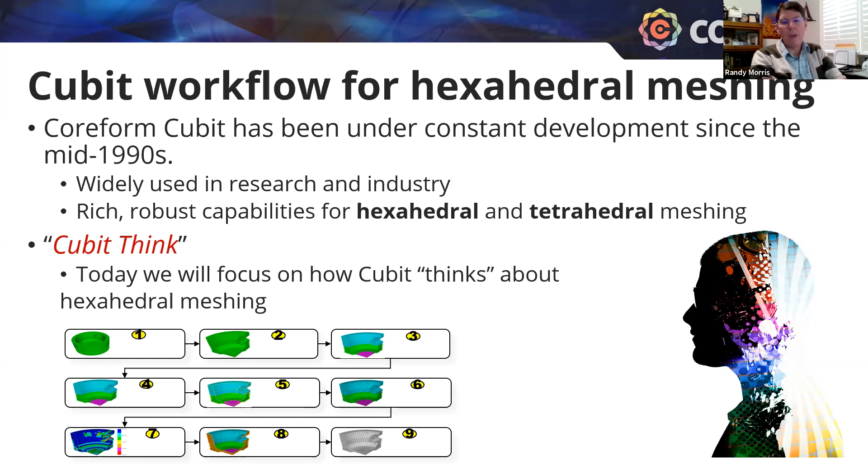So really the purpose of this webinar is to talk about that workflow, and we call it Cubit Think. The workflow is this: we import solid models, simplify geometry, and decompose geometry. Steps 2 and 3 are where we will focus today, and within those steps there's a particular workflow that is most effective.

Step number 4, imprint and merge, is something that we'll talk about a little bit. It makes Cubit somewhat unique in that it is a specific part of the workflow that we need to do by hand - a little bit different than other codes possibly. There's some good reasons for this, for having step 4. Other workflows have good reasons for that too, but this is the way Cubit likes to do things.

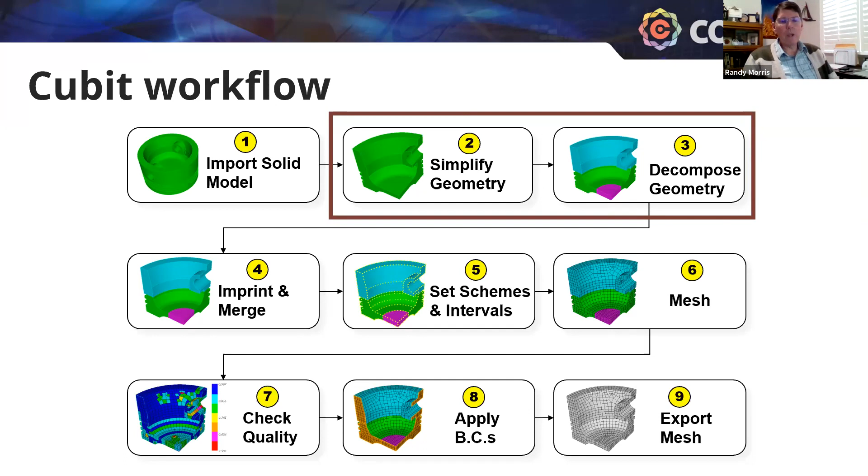Step 4, so 2, 3, and 4 really are where we're going to focus our attention. Once we've got the model ready to go, setting schemes and intervals and meshing is actually quite simple. So let's go ahead and look at these learning objectives.

We're going to take this - you saw that model at the beginning, we call it knuckle, we'll see it on the next slide. We're going to mesh that knuckle using 2 different workflows. One of them will be using sort of our standard power tools, commands from the command panels and the command line, and a few things like that, sort of the normal way of doing things.

The other way is going to be using the ITEM wizard, which is a user-directed wizard. It is really, really good for new users and intermittent users - in other words, if you're not meshing all of the time, you mesh a few times a year, ITEM might be really, really effective for you. Or if you're brand new, it might be a good way to learn the workflow.

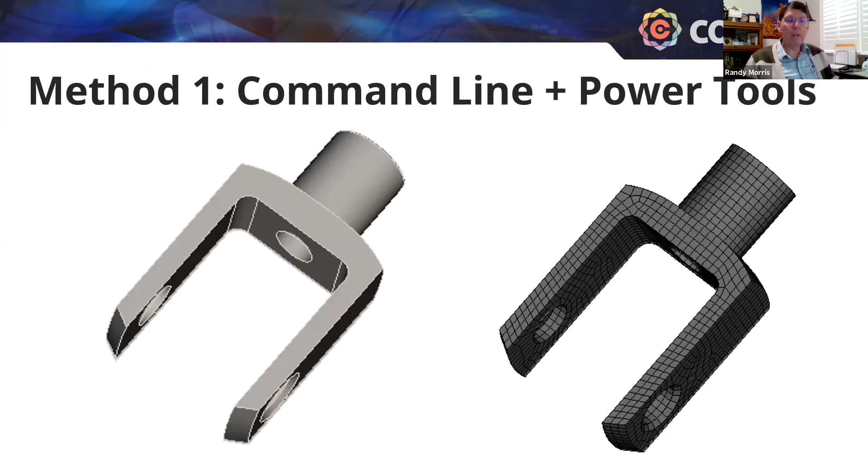So this first method is the command line and power tools, and so let's go ahead and dig in. If I'm set up properly here - here we go, hang on. All right, this is live Cubit. I've got this going, and I'm going to go through this workflow with you.

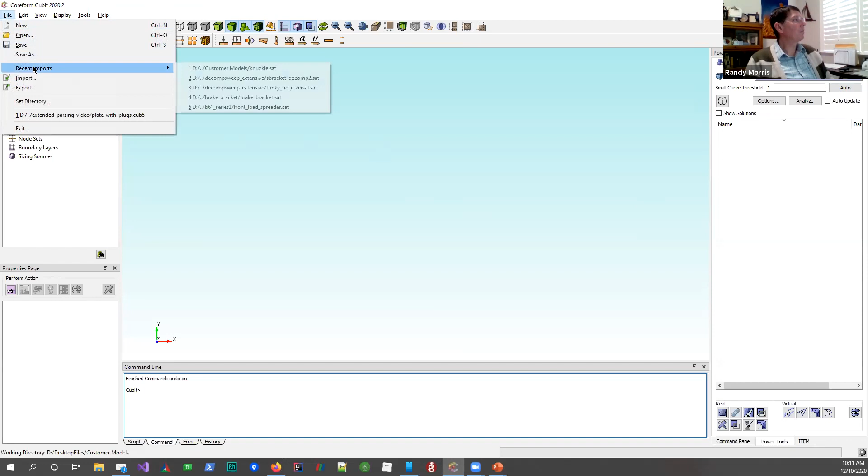All right, so here we go. I'm going to go ahead and import that model. I'm going to go to File menu - obviously I've got it in my recent imports. Go over there, grab this guy. That's what we call knuckle, and it's a very interesting little thing.

It's not going to be automatically hex meshed because there are some issues we'll talk about, not only in terms of defeaturing, but just in terms of how do you actually put a continuous hex mesh on something that looks like this. It's got holes, it's got these blends down here, it's got this cylinder up here with a hole through it, it's got some interesting features along there. All of these make hex meshing challenging.

We've got this tiny little surface. Let me show this little surface right here. That little guy there. This little guy up here at the top. These are all challenging things. If you think about putting hex elements in something that looks like that little small surface around there, that might not be effective. Anyway, those are the things that we learn about.

So let's do this. I am in what we call the geometry, the diagnose geometry power tool. I got that by clicking on this tab at the bottom. See if I'm on the bottom right. These are our command panels, the power tools, and ITEM. We'll get to ITEM in a bit.

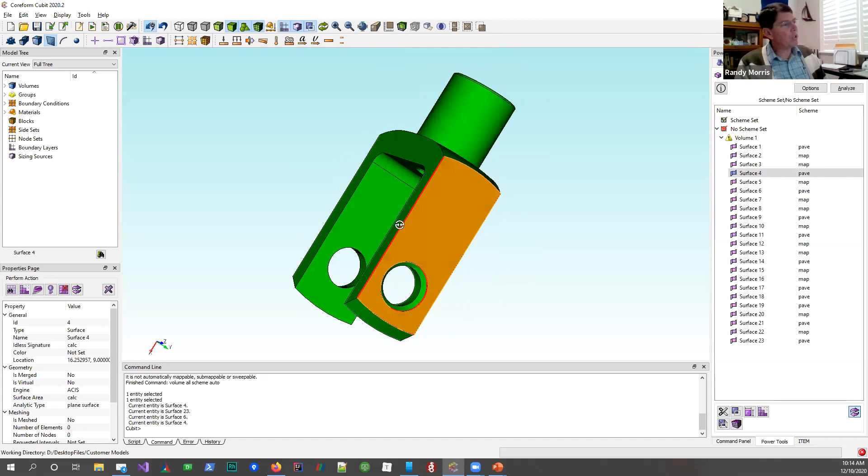That's interesting because how we usually do this is when we do hex meshing, we're looking for surfaces that we can pave, that's a quad mesh, and then we sweep from a source to a target through the part, and the linking surfaces have to be mapped. So in this particular case, if somehow I wanted to pave this surface, and that would be required, right? Because I've got this hole, I can't put a map, I can't put a regular grid on this surface. It needs to be paved.

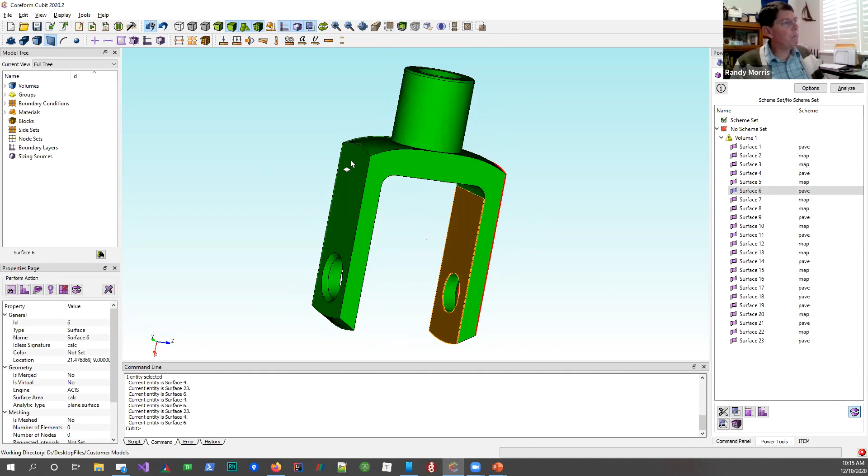And I can look at that just as an analyst and say, well, that's got to be the source, maybe the target's over here, it's got to sweep through this direction, which means this surface needs to be mapped. Cubit's saying no, the only way I can think about that surface right now is pave. So that is giving me some clues of how I need to treat this model. In a subsequent step, we're going to isolate some of these parts by cutting them and making smaller volumes that can be paved and then swept. So in the end, I'll cut things here so that this surface can be paved, this surface can be paved, and this surface right here, which is a linking surface, as well as this one down here, can be mapped. It has to be that case.

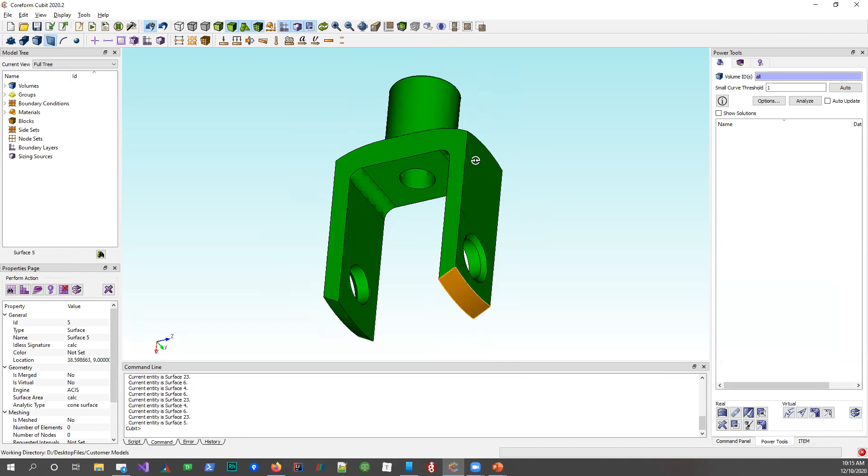So anyway, let's go back to this tool. So a map surface then, Randy, is one that just has 4 sides with no holes inside, is that right? That's right. So yeah, when we look at a surface to be mapped, we have logically 4 sides. Doesn't have to be an actual rectangle or a square with 90-degree angles, but logically 4 sides, and we can put a nice regular mapped grid in there. That's right. Great, yeah, thank you.

So back at this tool, I'm going to click Show Solutions. For some of you who have used Trelis or Cubit for a while, this is version 2020.2, which we released about 2 weeks ago. This is a new feature in this tool, Show Solutions. The old version of the tool just did this. We're going to click on this, which for those who have been around for a while recognize this as an ITEM-like interface. I'm going to go ahead and click Auto Update, so as I make changes here in a minute, you'll see why I do that.

I'm going to click Analyze. I've given it a small curve threshold of 1 as an experiment. That means that's the size of the mesh element I consider to be small. Any feature smaller than 1 will be flagged as a potential issue.

That makes sense, right? If I've got a curve that's shorter than 1 - remember, Cubit is unitless, so 1 is just relative to this model - and I've said I don't want to put a mesh element smaller than 1 in this model, this will be flagged as a feature that we need to address.

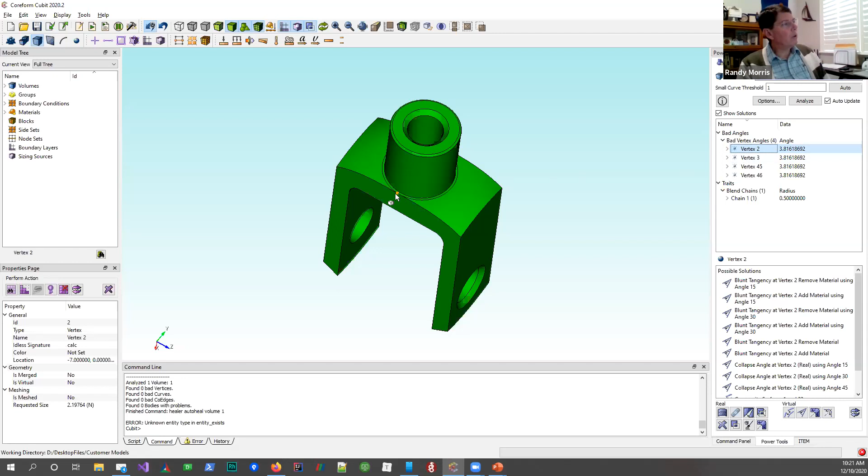So I like that a lot. I'm looking at this model though, thinking that I don't exactly love the answers that I'm getting. If I click on these up here, vertex 2, clearly there's an issue down there with those surfaces. I don't like those at all - I can't put a good hex mesh in there.

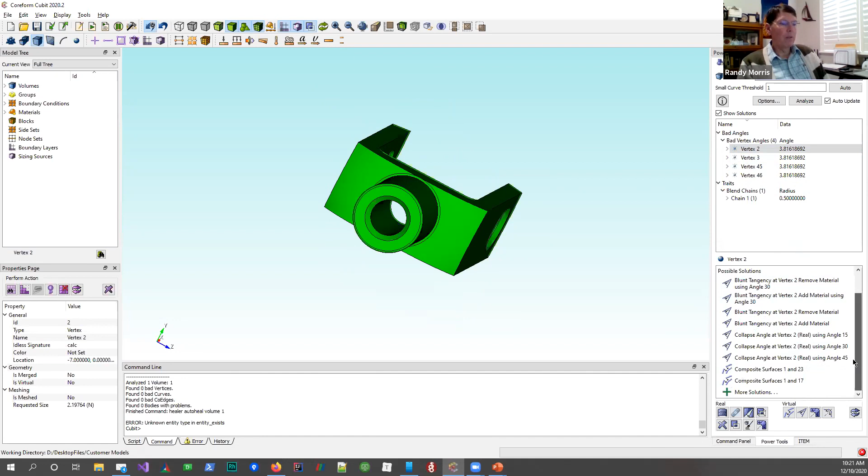Down here, as I'm clicking on these things, it is giving me some ideas of what I might do. There's blunt tangency commands, there's collapsing angle commands, there's compositing surfaces 1 and 23. If I click on that, for instance, to say, well, we could do this - we could take this surface up here and this surface right here and make them one surface.

Well, no, that's a terrible idea. Let's not do that, right? Again, we're just trying to give you ideas of things that you might do as an analyst. In this particular case, I don't like these things, so I'm going to select out there so that highlight goes away.

Let's look at this for just a moment here. We have this idea of removing surface 15. So we've got this blend chain.

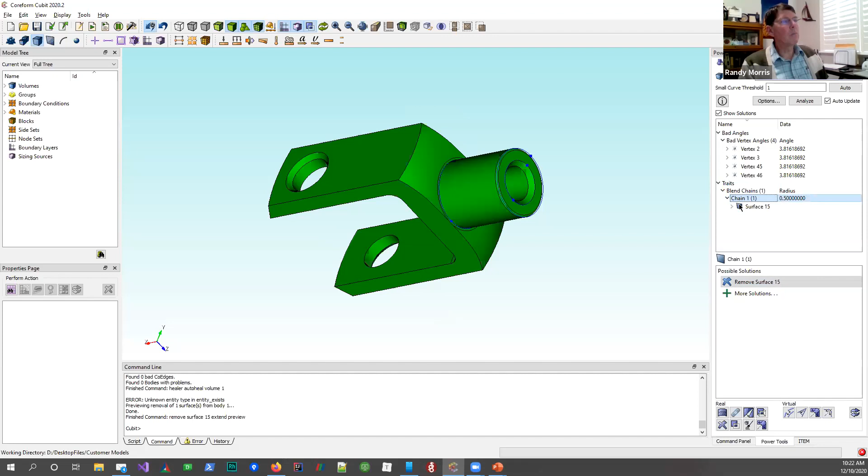And it says remove surface 15. Surface 15 is that little guy right there. I right-clicked, drew it, and that's how I saw that. To get my graphics back, I clicked that little guy up there.

But I'm seeing that as a surface that is problematic. It says I can just remove it. So if I click on that and then right-click, execute, it's going to generate this command down here. So my eyes now are down on the command line. It just generated remove surface 15 extend.

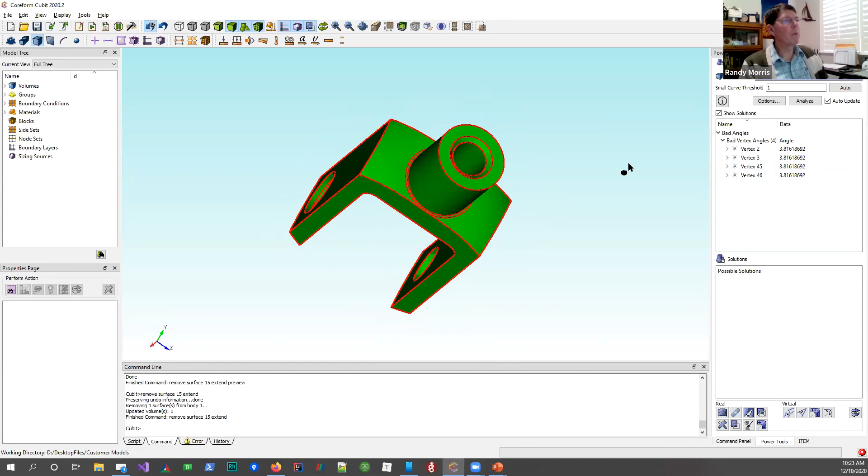And now that particular issue has gone away with regards to that blend chain. But I still got this problem down here, this little guy down there. I know I want to get rid of him. So let me turn that off right there so I stop highlighting the volume.

I'm going to do something here. I'm going to change the small curve threshold to something a little bit smaller, to 0.5 and see. I didn't want to do that - sorry, hit auto, it's something different. 0.5, analyze, and I've got this surface down there.

Now this has been defined as a closed loop. Again, these terms aren't that important, but what it's telling me is that the curve for the loop around this surface right here and the curve for this surface right here are very close. Well, they're very, very close, right? So I know this, I do know I want to get rid of that.

So if I click on that guy right there, it says one thing I can do is remove surface 17. In this case, I'm going to right click again, let's go to the command panel this time. And you can see that the command is going to be similar to the other one. We're going to issue a surface 17 remove, the extend option is on by default. And if I preview that, which we're already doing, we'll see that we're going to get this model.

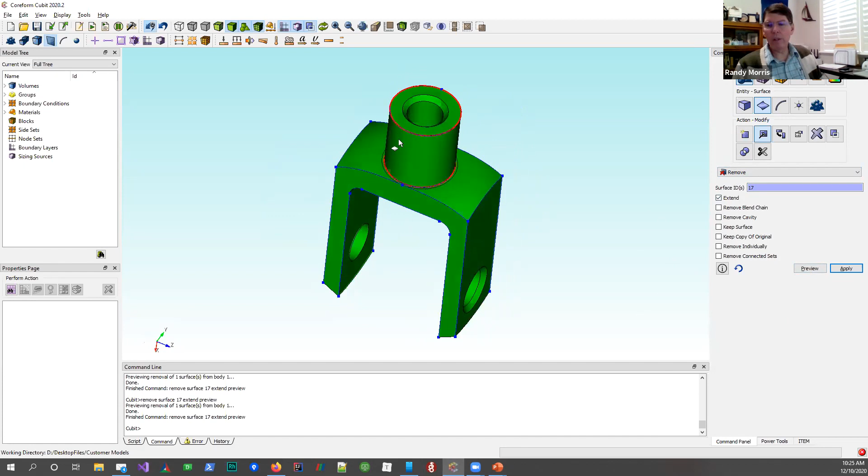Again, the preview is somewhat useful. What it tells me is it's not going to do anything terrible to my model, it'll be mostly intact. And I'm going to hit apply this time and go back to the power tool. I'm going to analyze it again. And it tells me surface 18 is a closed loop.

Well, I know something about this model, and I know as an analyst in this case that I'm going to ignore that. It's not actually going to be a problem, because I know how I'm going to attack the decomposition of this part. So I'm going to leave that alone. Again, it's a false positive, I don't have to act on it. There's nothing here that I want to do.

We could remove it - that seems like a horrible idea, right? Let's not remove surface 18, let's not composite 18 and 19 or any of those things. And let's just move on. So the next step in this thing is to decompose it, and the way that I'm going to do that is we have a term in Cubit called web cut.

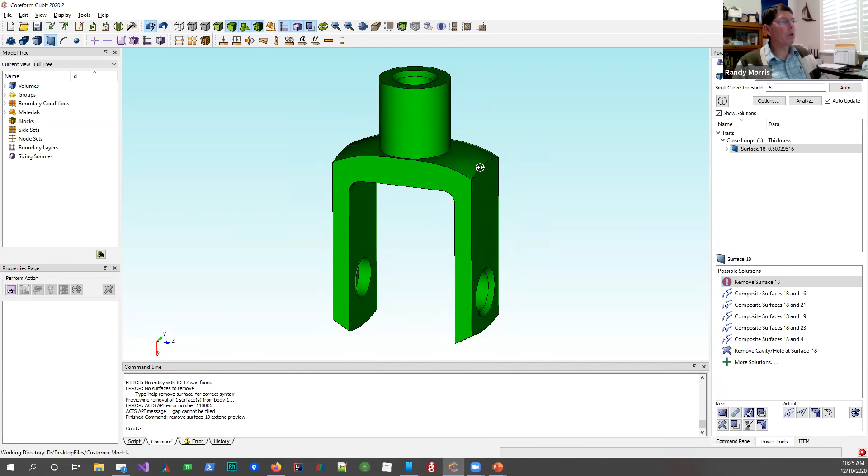I believe, Carl, is that a term that's sort of unique to Cubit? That is a term that is unique to Cubit. No one really knows where it came from.

There's an urban legend that back in the day, someone at Sandia was looking at an I-beam. So an I-beam would be a piece of steel like this and a piece of steel like this, right? You'd use it in a ceiling or some other structural situation. And they wanted to separate the top plate from this thing, which happens to be called in English a web. And they came up with a way to cut that, remove this from here, separate these two, turn just one volume into two volumes, right? Volume 1, volume 2, and that was called web cut.

I might have just made that story up. I don't know, I've heard that though, and I'm sticking with it. It is a good urban legend. That's a good legend.

So we'll do this. We're going to go to the command panel now, and we're going to go back here to geometry, volume, this pair of scissors for cutting.

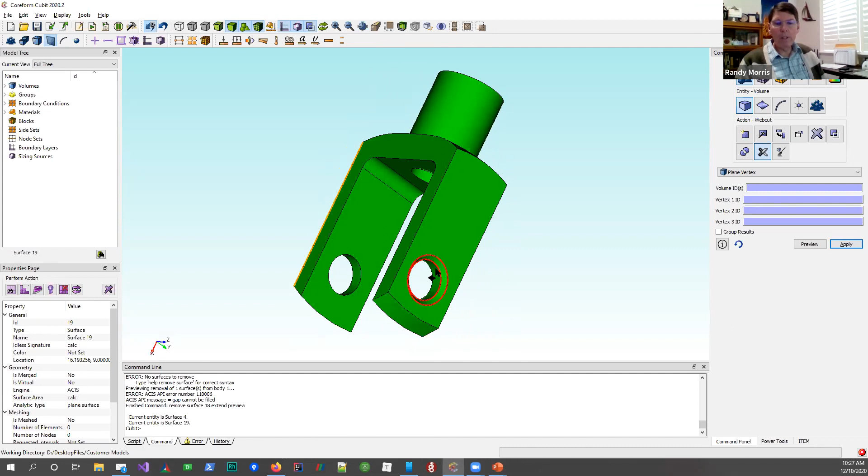I want to cut this volume up. As I'm looking at this, I know a couple of things. I know I have to put a paved mesh on this surface and on this surface, because I have to do something with those holes. If my analysis didn't need these two holes, I could easily remove them. But in this particular case, I know I want to have those holes, so I've got to do that.

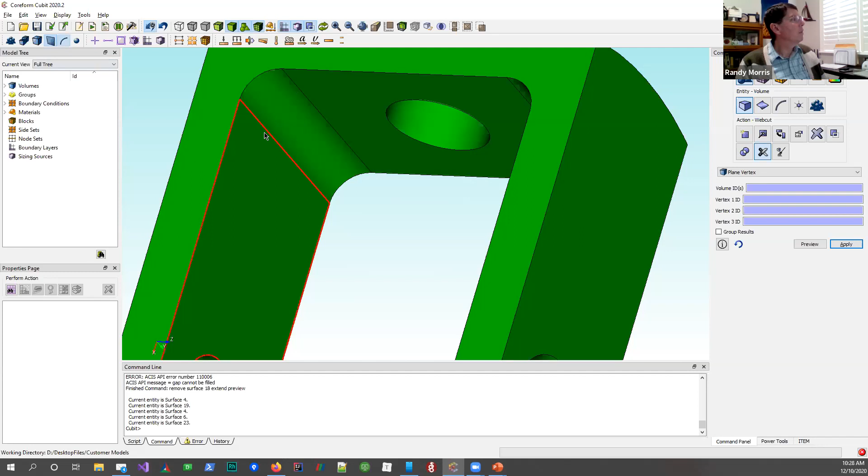So I know I've got to pave from here to here, and this has to be a linking surface. In order to do that, I'm going to isolate this part and this part from this part up here by cutting along these curves. You can see these curves - let's zoom in a little bit. I've got that little curve right there, let me highlight it. I've got that curve there, and that curve there. These are going to be good places for me to cut.

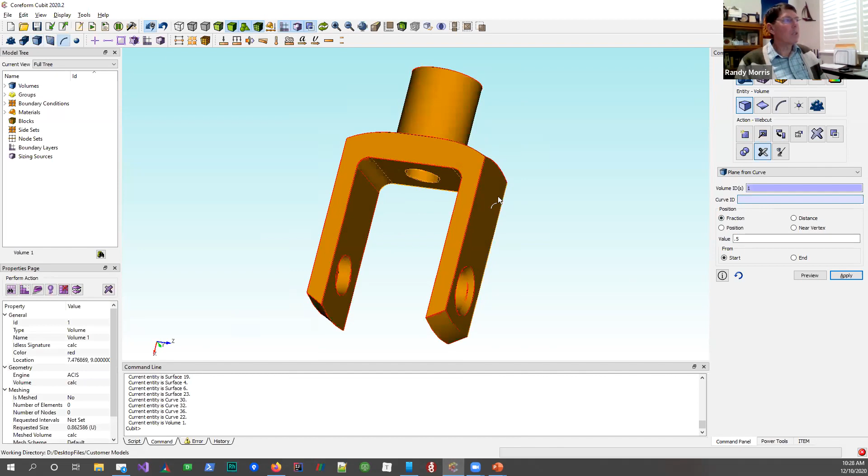There's a number of ways I could actually do that. I'm going to use a particular web cut method here for purposes of the demo, and go down and find one called plane from curve. Another way to label this is plane normal from curve - you'll see the command, when I execute it, actually has the keyword normal in it. So here we go: I want to select volume 1, I want to select this curve as my target curve, and I want to cut it normal, and I'm going to show you something here now.

I'm going to do one from the start. Let's see how that looks - I'll hit preview. Let me say this about command panels: nothing happens for real until you hit apply. The state of the model will not change until you hit apply and actually issue that command. You can see down here at the bottom, we did issue a command: web cut volume 1 with plane normal to curve 33, fraction 1 from the start, but we added the preview keyword, which means all we're going to do is show you graphically what's going to happen.

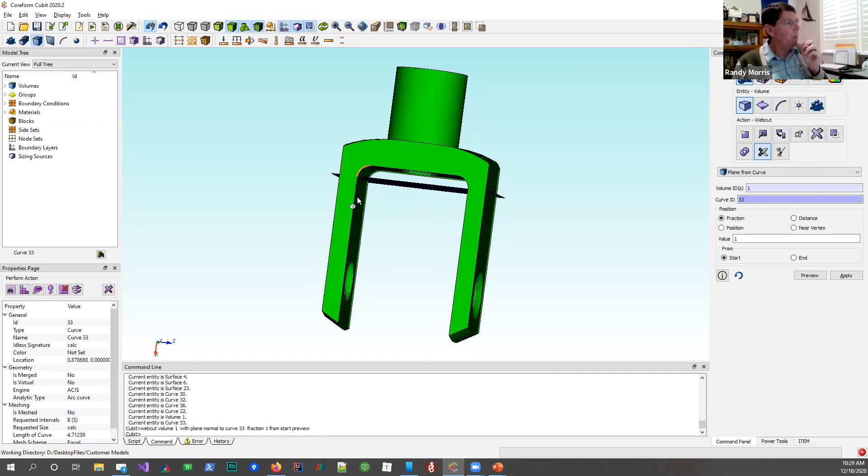In this particular case, I really like that cut. That tells me if I execute this command, I'm going to isolate this piece down here, and this piece down here. I get a 2-for-1 kind of a cut, and I'm going to do that. So let's go ahead and apply that cut. And now I've got these volumes.

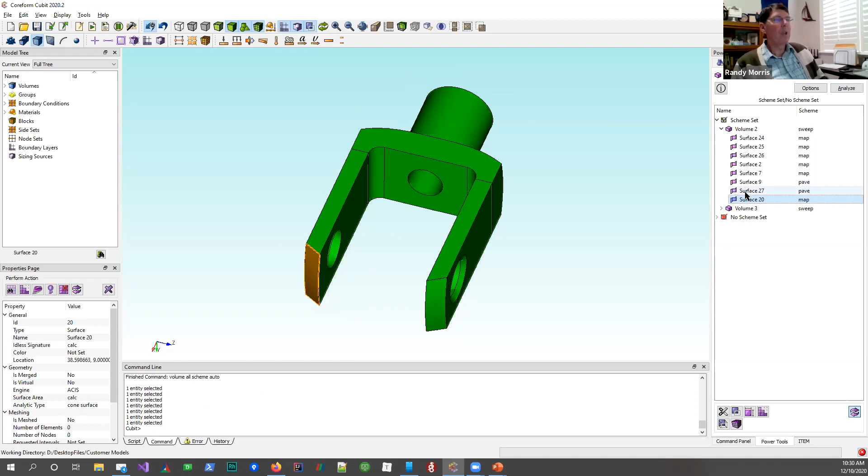I'm going to go back to my power tools for a moment here, change this to all, select analyze, and look at this - volume 2 is now sweepable, volume 3 is now sweepable. If we were to look at the surfaces, we can see surface 24, this little guy up here, is going to be mapped. That's a linking surface on the other side, right? That's going to be mapped. This is what we would expect to see - even inside those holes, those will be mapped surfaces. And then these outside things here will be paved just the way we would expect for that particular volume.

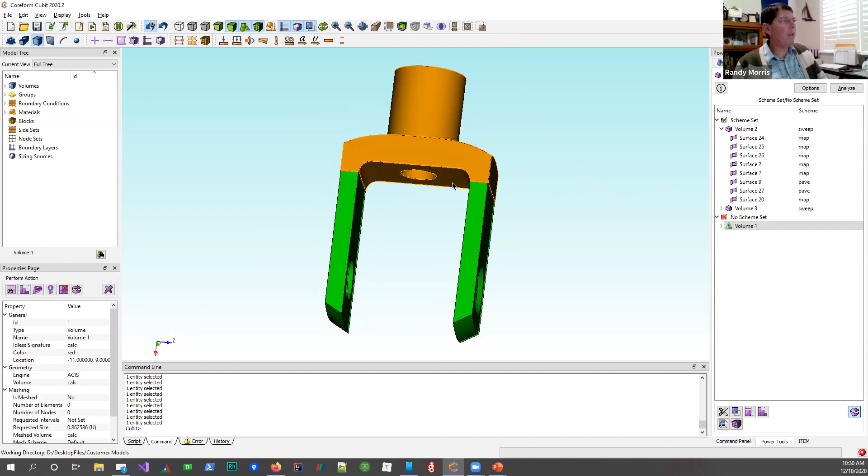So let's go back to the command panel. That was a nice little check, and it tells me this: that volume still is not ready to be meshed. I cannot pave and sweep that - I don't have anything that looks like it's going to work. I'd like to sort of pave these surfaces at the top and then sweep those all the way down to this here, because I can do that very nicely. But these little blends in here are going to cause a problem. So let's isolate those - we'll continue going.

So go back to the command panel. We're going to select that volume, and we're going to select that curve again in this particular case, but this time we're going to do something zero. Let's change this to 0, we'll use that. And so that's telling me this: that I'm from the start of this curve. So that apparently tells me that this particular curve 33 starts right there. I'm at 0 fraction from the beginning of that curve, and I'm going to make this cut normal to that curve at that location. That's what that's telling me.

If I were to change this to 1 and hit preview - hang on, let me clean that out - it would do this again, which is not useful. I'm just trying to show you how I use this fraction right there. If I go back to 0 and do a preview, or if I had changed this to end, it would do that, right? So the command I want is cutting volume 1 at curve 33, normal to that, 0 distance from the start of that curve. I'll hit apply. Let's go back here quickly and hit analyze on all volumes.

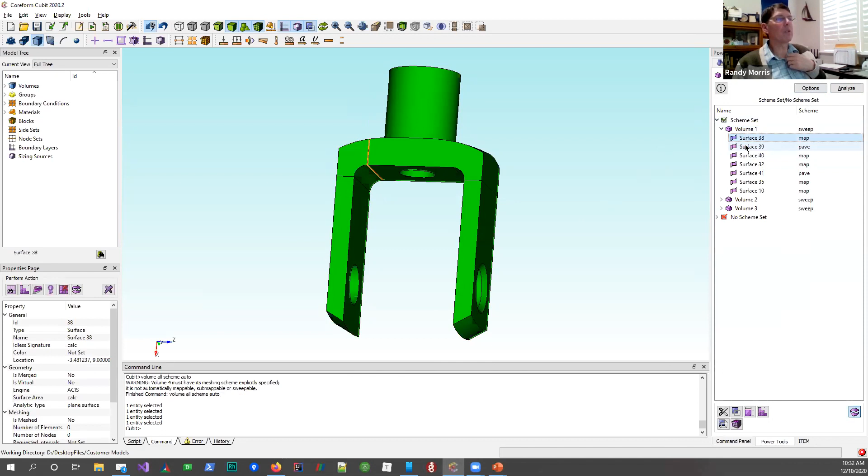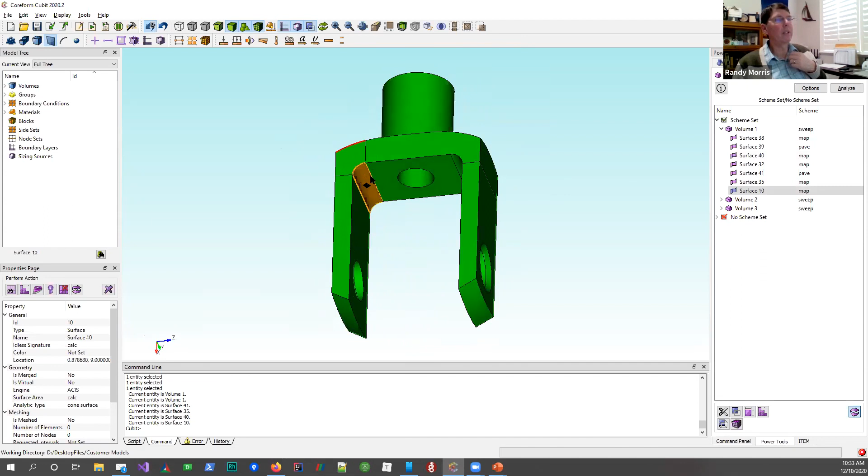And now I've got that one ready to go too. So we've got map surfaces there. We're going to pave that surface, pave this surface, and all of these other surfaces—as you can see, the linking surfaces will be mapped. It's exactly what I would expect, including that little guy down there, which is logically four-sided, so we can map it.

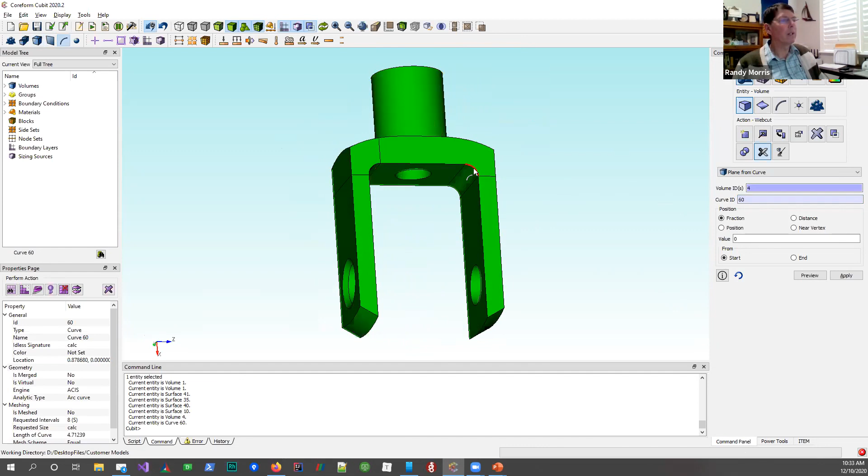So let's go back and cut this guy. We're doing fine, let's look at this volume again. This time we want to select this curve right there at fraction 0. I don't know if that's the start or the end—let's do a preview. So I don't want that, let's just change that to the end and do a preview. That's a good cut, I'll do that.

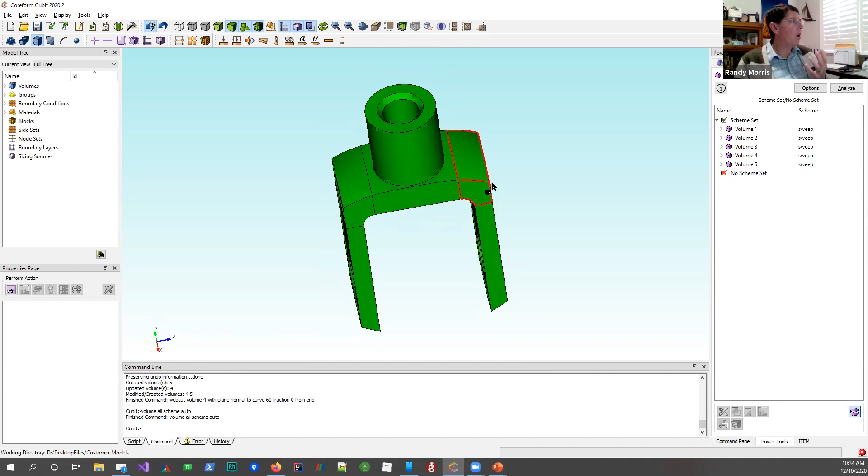I'll go back to my little power tool, select all, hit analyze, and now I don't have any that I can't mesh—all these volumes are meshable. So if we remember that flow chart, which probably we don't, although I'll post these slides later: we have now defeatured. We took those two small surfaces off the top of this cylinder, and at the bottom we decomposed the volume so we have sub-volumes that are pave and sweepable. You can see they are legitimate volumes in our model tree over here.

The next step, though, is what, Carl? Can you remind us what the next step is? If I unmute myself, you can. The next step is to go ahead and imprint and merge so that we make sure that we have one continuous volume when we're going through.

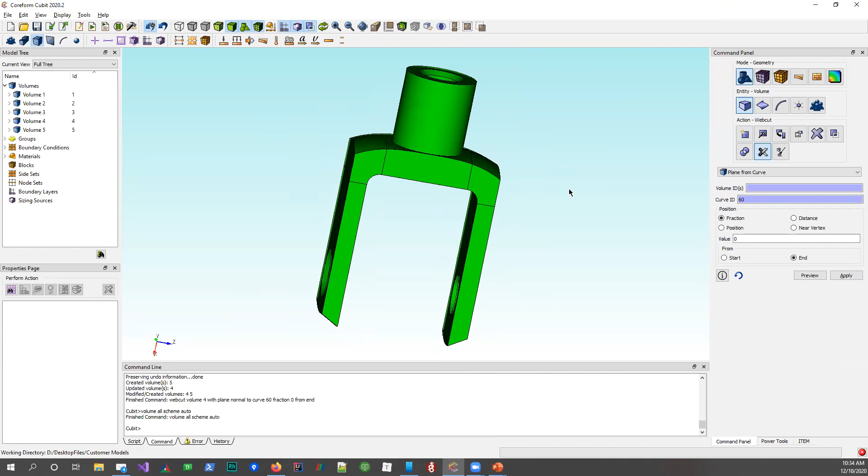So what is imprint, Carl, and what is merge? How do we think about those? Imprint essentially takes the image of the curve of the surfaces and maps those across the boundaries. So if I have two surfaces that have features that interlap, imprint will map all of those surfaces onto the same surface. In this case, they're really simple because there are only boundary curves—we don't have any internal curves in this, which is a good thing. It makes life simpler.

In general, when you're trying to do these web cuts, look for cuts that will create mapped, or what we call submappable, rectangular surfaces that are kind of combined together. Imagine taking a cardboard box and unfolding it—all of those pieces individually are mappable, so the whole thing is submappable. You want to make cuts that will do that. When we do the imprint and merge, we take the curves, map them from surface to surface, and then merge those surfaces so they're shared between the two volumes. That's what merging is—sharing those surfaces.

This is a step that's a little unusual for new Cubit users. Other tools might do this too—they have to do the same thing effectively, however they handle it. In this particular case, we make it an explicit step. If these were just contact surfaces with slippage I wanted to analyze, I wouldn't merge—I'd want those two surfaces to stay separate and put boundary conditions on them to analyze for contact. In this particular case, we're analyzing this one overall knuckle, this one volume, by merging these five volumes together. In the end, we still have volumes 1 through 5, but they'll be imprinted and merged so we can put a continuous mesh on the knuckle.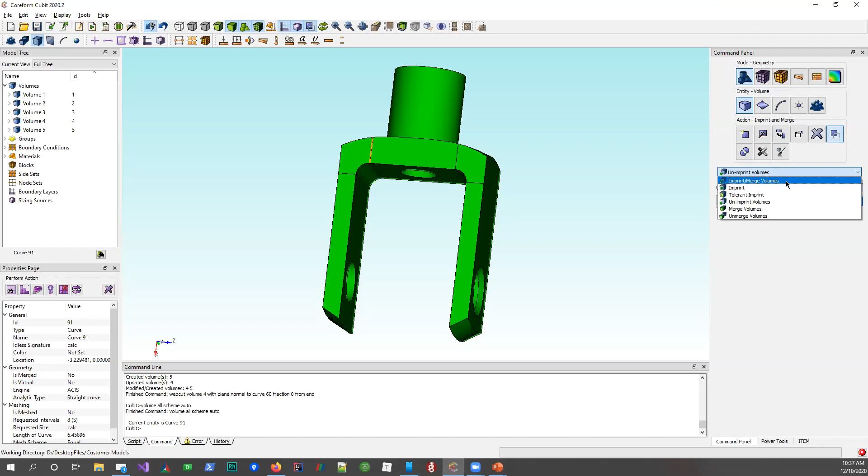So the way I do that is this: I'm back to geometry, volume, this little icon—imprint and merge volumes. And I can select this one right here. Now, Carl, is it true in this particular case that because these curves are all external on the boundaries, we don't actually have to imprint? That is exactly correct, yeah, that's important that Carl mentioned that—we don't have to. We will; it doesn't hurt anything.

Typically, but you wouldn't necessarily have to. It's a good practice to do so. Most cases you will. So in this case, I'm going to select all, and I'm going to hit apply.

It's nothing much to do. The command is merge volume all. We issued two commands, imprint volume all and merge volume all. We can see that down here on the history tab. These are all the commands we've issued so far today. We keep doing these volume all scheme auto to see if things will mesh, and imprint volume all, undo, and then merge volume all, undo.

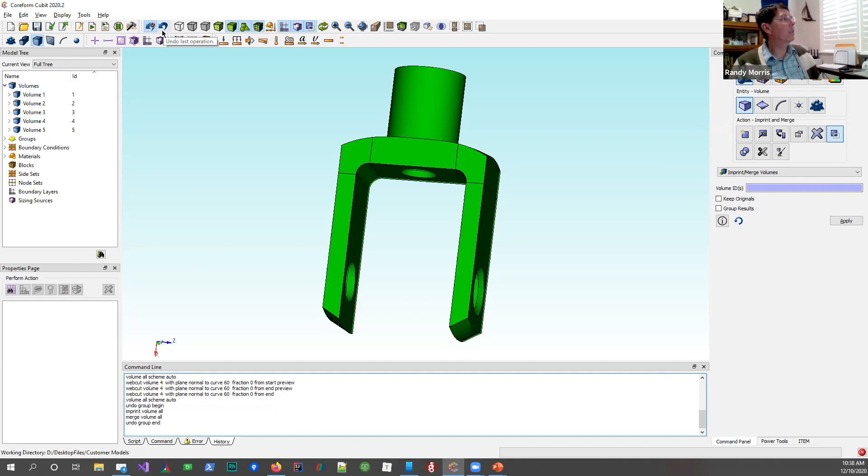Undo just means that we've added these commands to an undo stack. If I went up here, I could click undo and it'll undo that last operation. We won't do that. So this is ready to go.

So the next step is simply to go and set my interval sizes, so my element sizes for the mesh, and let it do its thing. In this particular case, well, let me get there. So we'll go to mesh, volume, over on the right, setting intervals, automatic sizing.

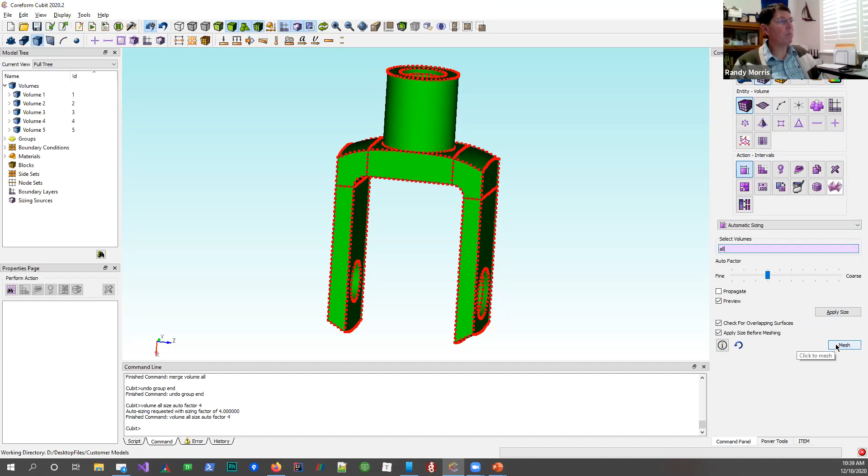I'm going to select all. And as I move this little slider here, you can see an estimate of where the intervals will actually be set. This is not exact, but it's very, very close. I'm going to apply that size. And in this particular case, all I have to do is hit the mesh button. And there we are. So there's my mesh.

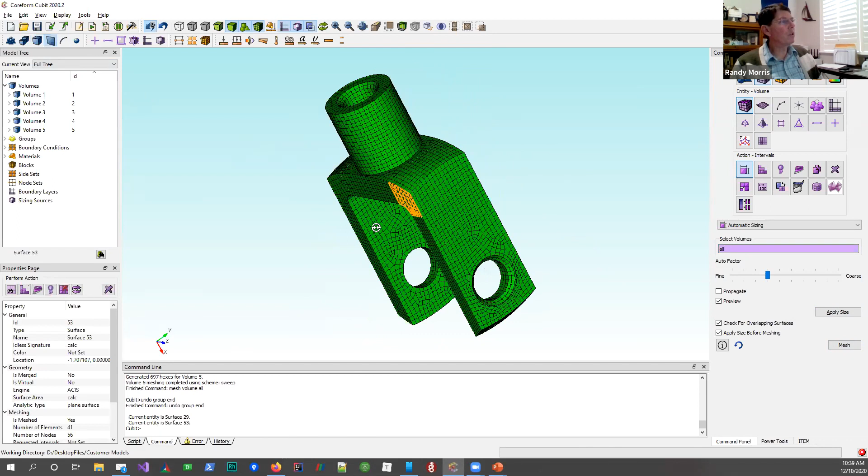For that particular part, you can see easily now we've got paved meshes over here. We've got in these surfaces right here, clearly mapped, right? You can see that now, mapped. Here we pave from this surface to this surface, and mapping surfaces are the linking surfaces in between. And on this one here, it's interesting because we can see that we have a paved surface up here, on this surface right here, on these surfaces right here, and they sweep all the way through.

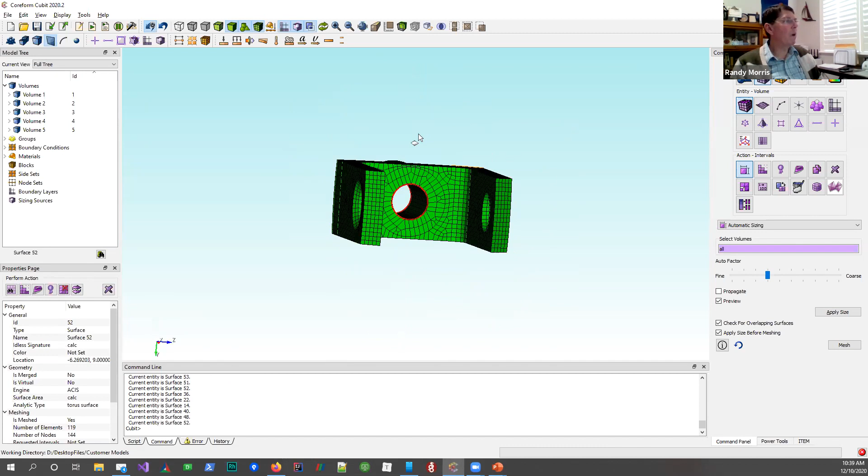And if I go like this, looky there, you can see actually, maybe that's an instance, Carl, where we actually did need to do the imprint. No, that's not true. But we can see the outline for this curve that's running along the bottom of the cylinder that's actually made its way all the way through this. That's exactly what we'd expect when we are sweeping from several sources down to one target. We would see this mesh propagated through.

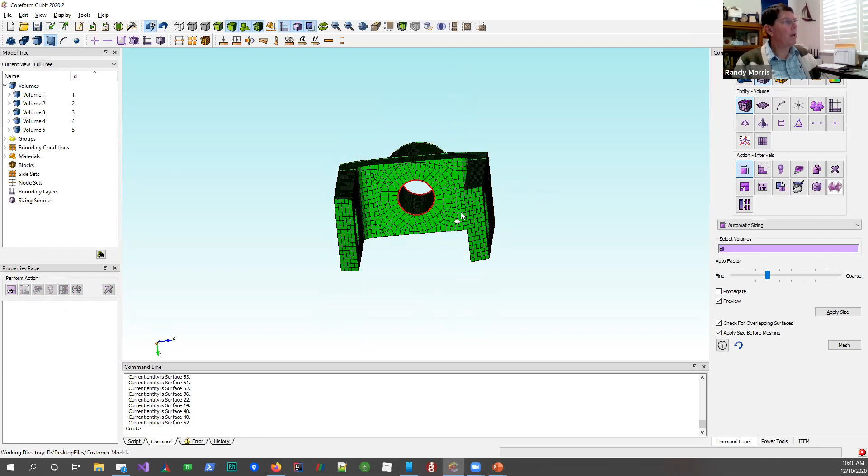Anything you wanted to say about that, Carl, in particular? No, I think you've nailed it. I nailed it. Let's see if it's any good.

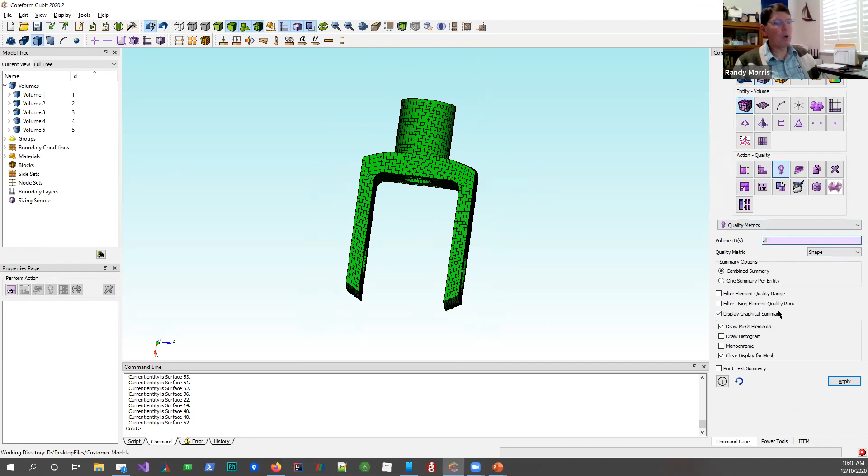So now we'll go over here to this determine mesh quality. I'm going to select volume all again. The default metric here is shape. We've got some defaults to show a graphical summary, to draw the mesh elements. I'll hit apply. And it tells me that the lowest quality element, which are these down here, has a shape metric of 0.3. We consider anything above 0.2 to be good.

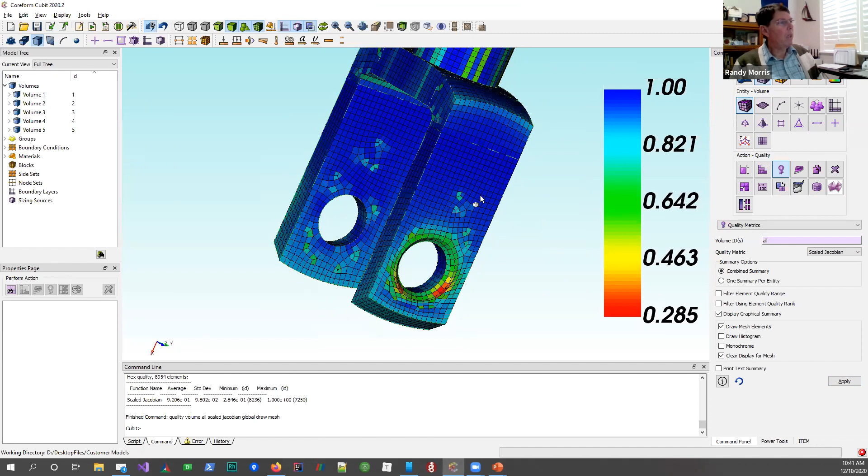Your simulation might say that's not good, and so you might want to do something different down here to refine that to get better quality elements. If we change it to something like scale Jacobian, I'll hit apply again. We can see that the lowest scale Jacobian is 0.285. Again, same area, we would expect that. And in our world, most of our worlds, that is a sufficient quality.

If we were to follow through on the workflow at this point, we would go ahead and set up for, well, we might go ahead and add material blocks, side sets, node sets. Those are terminologies that we use in Cubit too. We're not going to do that today. We'd set up the boundary conditions, and we go ahead and set up an export.

All of these steps are relatively straightforward, and some codes will accept those boundary conditions, blocks, side sets, and node sets. The boundary conditions associated with them, we can set up force and pressure and heat flux and temperature, a bunch of CFD boundary conditions. Some codes just have you export the mesh directly into them and set up all the boundary conditions there. So that's a typical scenario at Sandia, where they set up the boundary conditions in their simulation codes.

All right, let me flip back to my little presentation here. I can get to it. Oh, I'm looking at the wrong thing. Goodness gracious, Randy, there we go. All right.

Let's look at method number two, ITEM. It's an acronym for Immersive Topology Environment for Meshing. Also a funny story, but we won't get into that. So this is a wizard-like tool that is going to take me, as a new user or an intermittent user, through this workflow. I'll go through it a little bit more quickly, so I just want to really give you the idea. The commands that will be generated will be the same, and the workflow will be the same, but this is going to give you more of a guidance.

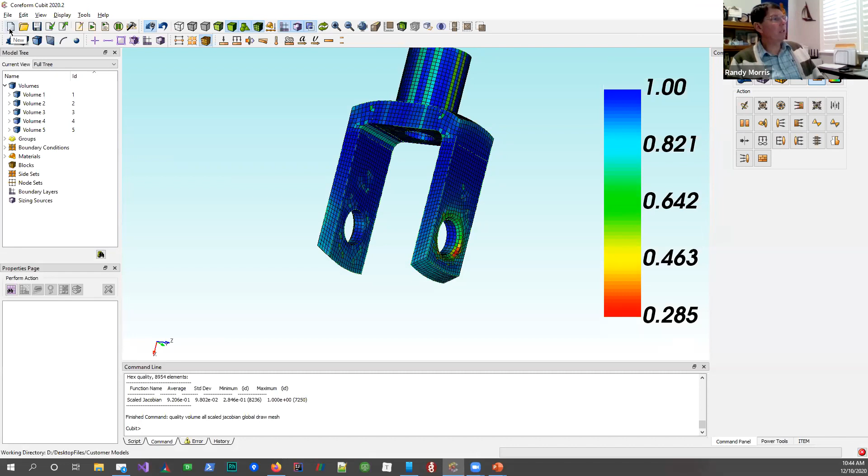So we'll go ahead and dive into that. We're going to start simply, I'm going to go up here to the top left where it says new. I'll click new, that issues a reset command, by the way. I'm going to go ahead and close all this. I'm going to go over to ITEM, and this is the workflow from top to bottom: this list of tasks. We import geometry, we set up the model, we prepare the geometry, we mesh it, we validate it, we define boundary conditions, and then we export it.

That's fairly straightforward. Once we get into a couple of these places, it'll give us even more detail. I'm just going to click on the button, or click on this, it doesn't make any difference, they're the same. I'll click on that, and it tells me this: as a new user, you can do a few things. You can open a Cubit file, you can import a CAD model, or you can build your own geometry.

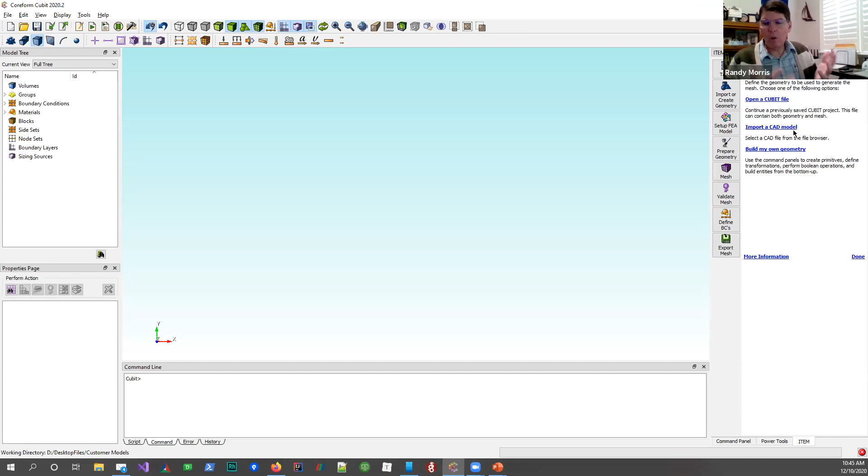Cubit allows you to build from primitives like cubes, toruses, frustrums, spheres, and all these things, or you can build from the vertex up. We've got many, many users in Asia, in Japan in particular, who love this for building. They build their geometry from vertices, curves, to surfaces, to volumes, and they do it all inside of Cubit. We don't consider Cubit a real CAD tool, but it does have all those capabilities, so you can do those things.

In this particular case, we're going to import a CAD model. In our simple metaphor here, we say, well, import an ACIS model, a STEP model, or an IGES model. Obviously, we can import lots of different model types, including native CATIA, Creo, SolidWorks, Parasolid, all of those things, right? They're all available with an add-on import module.

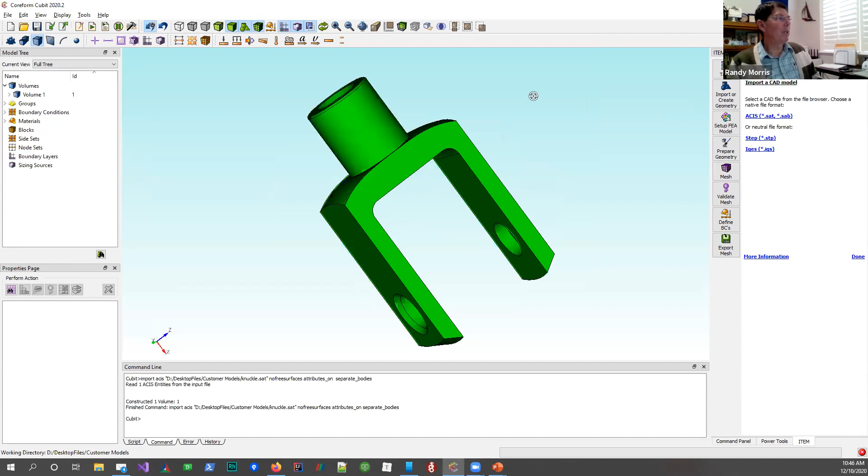In this particular case, we want to get that knuckle model again, and there we go. So it opens up now, finally a sort of standard dialog. I'll go down here and look for my little buddy knuckle, the most analyzed piece of geometry on Earth, at least in our world. And there we go, so there's knuckle again. When I'm done with this step, I click done. Think of these pages as on a stack, and I'm just hitting the back button.

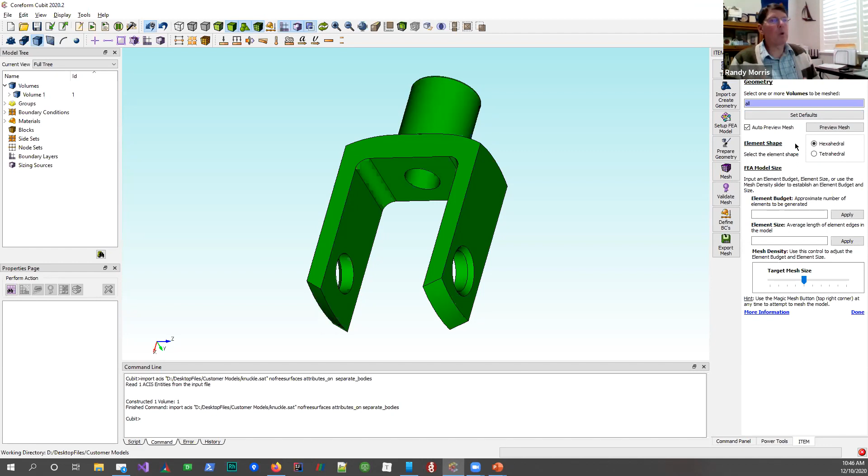So there we go, now I want to set the model up. This is interesting because I can tell Cubit, hey, I'm either doing a hex mesh or a tet mesh. Some of the guidance it gives you will be tuned towards hex meshing or tet meshing, and some of the sizing suggestions too. Obviously, we can put triangles and tets in smaller areas than we can with well-formed hex in tiny areas, so there's some trade-off there. In our case, we'll stick with hex.

I'm gonna grab this little guy down there and start moving it again. It's the same sort of thing we saw before, which shows me where my intervals might be. But it's also telling me the approximate number of hex elements I'm going to generate and the approximate size of those elements. In other words, you could come in here and say, I've actually got an element budget of N, and you can put that number in there.

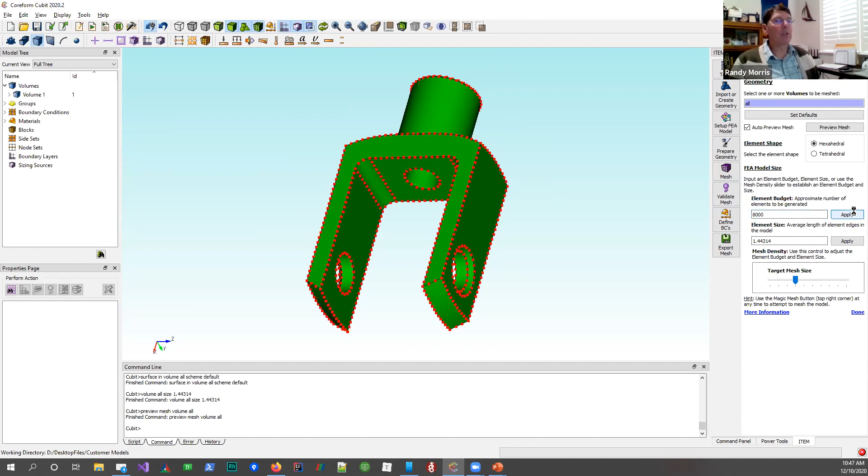We'll do that. Let's say your element budget happens to be 6,000 or 8,000. I hit apply, and it changes all of this and shows me what the mesh is going to look like for that. But I don't want to do that. I'm just going to go back here, kind of drag this around, get back to my 4,000 element deal. I don't have to hit apply, it's already set it. I'm going to click on done.

And now I'm going to dive into prepare geometry, where it's more interesting. You'll notice there's a lot of words in here too, so there's a lot of in-your-face, obvious help to guide you through this process.

I'm going to run check diagnostics, check meaning these. I can uncheck these if I don't want to ever look at connect volumes issues. By default, everything's checked.

I'll run check diagnostics, shows me a little progress here. And then it says you've got 3 areas of problems with this model that you ought to investigate. Could be some false positives, but it says you ought to investigate. These are laid out in a particular order from top to bottom.

We suggest the first thing you do is fix invalid topology, then remove small features, then do connect volumes, and then build the meshable topology. As we click in here, we'll see what these things mean.

We believe that if you do things in this particular order, you'll minimize side effects of defeaturing. We know that when we defeature, sometimes it creates additional problems, and we're trying to minimize that. So understanding this workflow is going to help you, even if you're an experienced user, going back and seeing, oh yeah, I want to do these things in this order, it's going to be most effective.

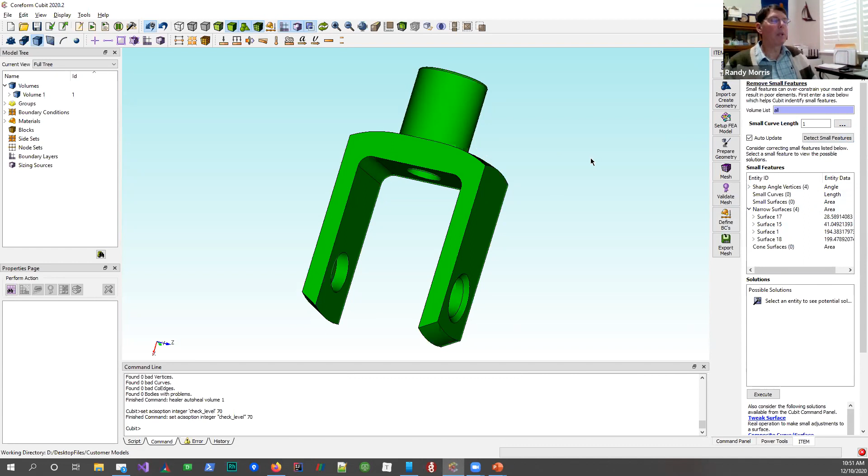This is slightly different than I even saw with that other power tool, which tells me a few things that are interesting, but we won't go into that either. There's surface 17, surface 15, surface 1, and surface 18.

As I'm clicking on this, you can see this is changing down here. It's that same metaphor of giving me a potential problem, possible solutions. And if I don't like those solutions, this is static information here, these are other things you can do related to narrow surfaces or small features that you might want to do.

I could, if I click on this, go to the tweak surface command in Cubit. We're just trying to give you a little guidance if you're brand new, or where can I go if I don't like any of those things? Well, I can go into surface modify. Tweak is a really powerful set of commands, and there's all of these options here. That's a good one to learn.

I'm going to go back to item, go ahead, select surface 17. I've got this execute button. Remove surface 17, I'll go ahead and do that. This has been updated up here, surface 15, remove surface 15, I'm going to execute that.

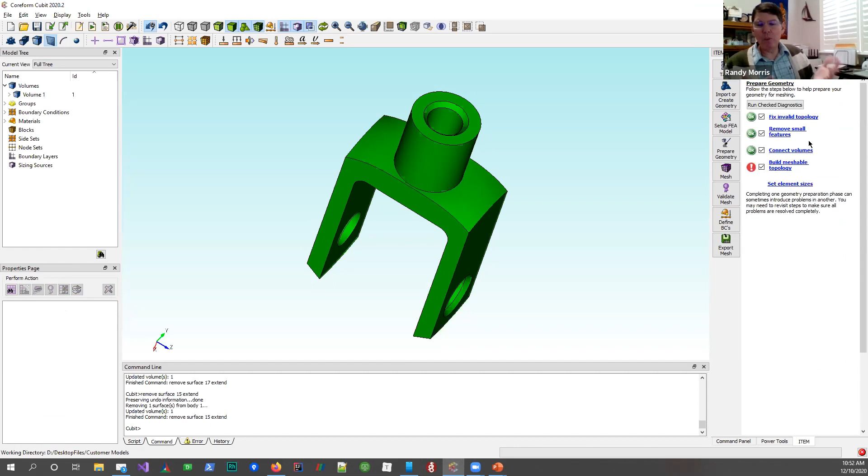I look at this one, surface 18, again I'm going to ignore it. I can just move on right now, or I can do this clever little thing and say actually mark as okay, that was a right click, mark as okay. And when I click done and go back, even though Cubit still thinks it might be a problem, it doesn't show up here. I'm not sure that's that valuable, somewhat helpful.

Let's go in here, and again we have this situation where we can check meshability. It says volume 1 is not meshable. I can do all of these things. In this case, I don't have any blends to worry about, but I do have volumes that I need to decompose.

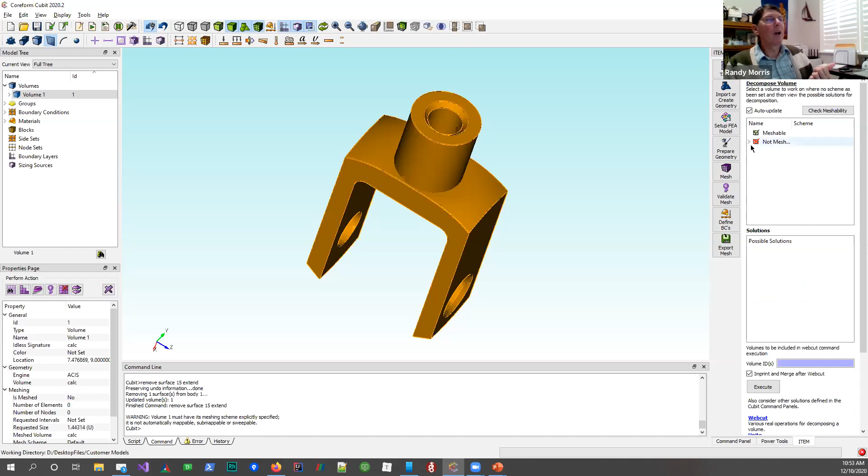So I'll go ahead and click here. Again, it runs that same thing. I click on that and it starts giving me suggestions. Looky, Carl wrote this, what, 10 years ago? Yeah, but remember those are suggestions, and I didn't have any machine learning going on 10 years ago to help determine which one should be selected. So yes, I need a person in the loop to figure that one out.

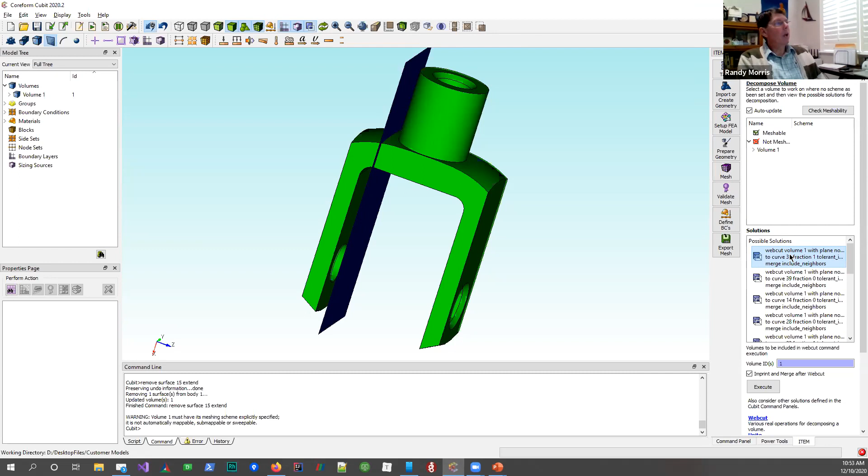So I've selected with my mouse this particular one. If I hit the down arrow, I get all of these interesting solutions. We can see from our last example some of them are pretty darn good, some of them aren't. It's a heuristic Carl used, and as he said, they're not necessarily the right answer, but they might be.

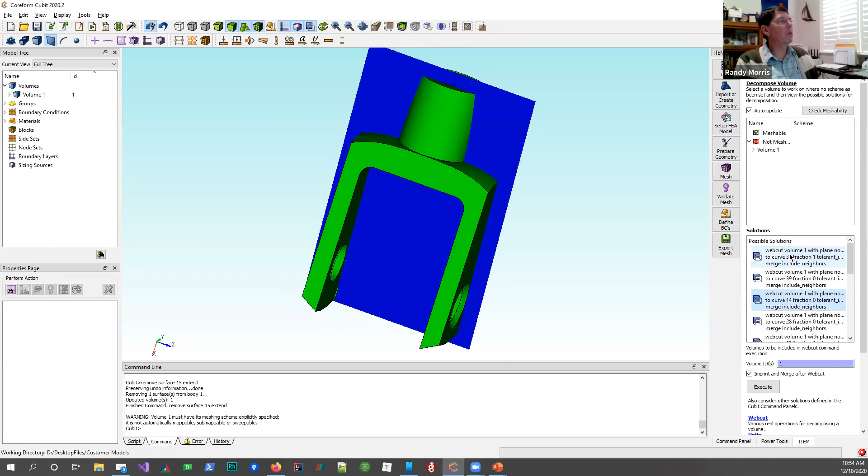In this particular case, I'm going to go ahead and select that one. Actually, I'm not, I'm going to go down to that guy and select that. I can right click, execute, or hit the execute button. And there we go, this updates, so 2 and 3 are meshable, 1 is not.

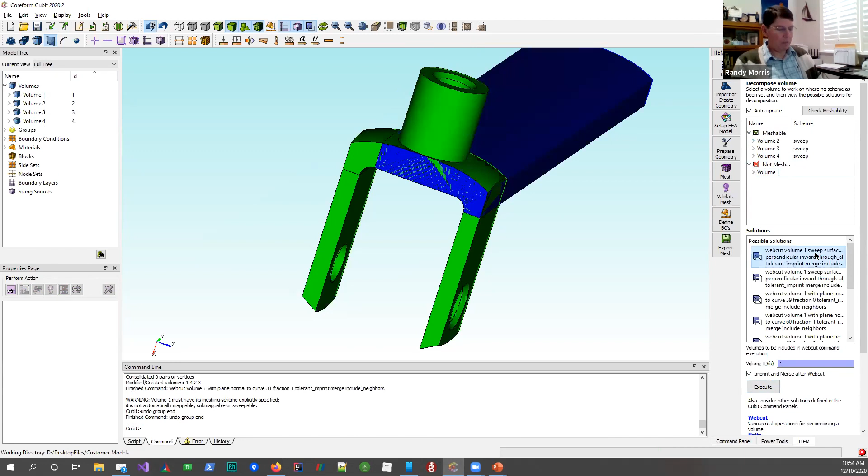Let's see what it wants to tell us now. We got something like that, I like that one, so I'll go ahead and execute. Now these 3 are meshable, this one is not. Same thing, I'll go ahead and click execute on that. And now all are meshable, so I can click done.

I noticed this yesterday, we're getting a false reading right here still, it says there's still a problem. Well, we know there's not, because we're really good at meshing and we've finished this. So I'm going to click done. That gets me out of prepare geometry.

Now I'm going to come into mesh. I'm going to give it all, I'm going to say generate the mesh. It said we're good, there's all my things. If there were a problem meshing, I'd get some errors down here with some possible solutions.

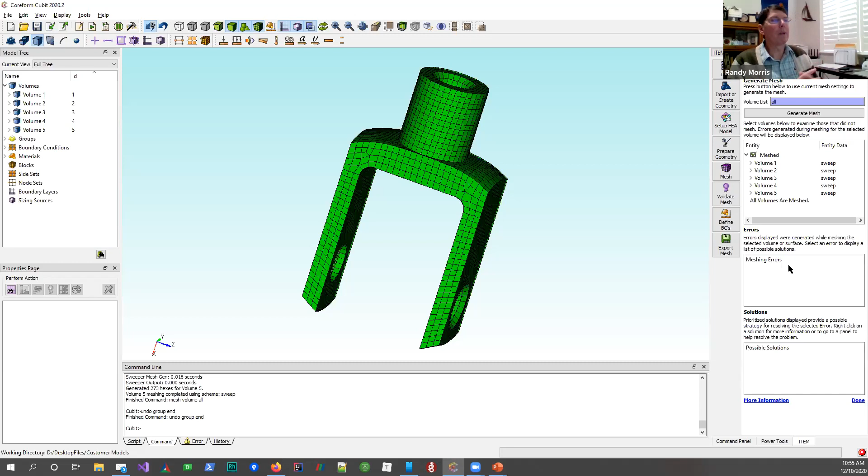I will tell you, this is the weakest part of the tool. There aren't a lot of good solutions if it won't mesh. It isn't always entirely clear why not. You'll need to look again at the model, and as an analyst, try to make some determinations there. But that one's good, so I'll click done.

Now I want to validate the mesh. Here I have the opportunity to select the metric I want. We'll select this — in this particular case this is interesting, it's different. I can actually set from here the minimum and maximum values for the shape metric. I'm going to leave them alone, but I can make a change. I can do that for any of these, obviously. As we go down here, you can see these values, so I'll leave shape the way they are.

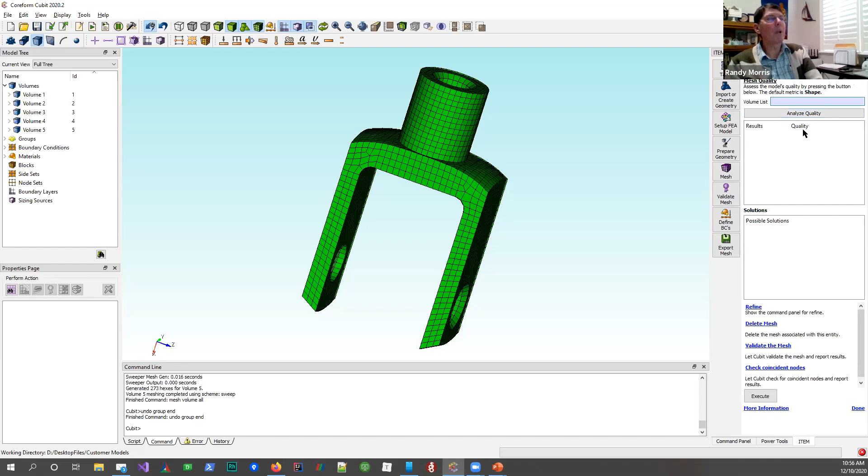I'll set done, I'll say check the mesh quality. Again, select all, analyze quality, and it tells me that my worst hexes are right there. I just highlighted that one, but the threshold is 0.29, so I'm okay.

I can delete the element. If you're a thermal kind of analyst, deleting elements is a valid thing to do. I can do some additional smoothing, I might do a local Laplacian smooth. If I hit execute on that, I can do that.

Let's see if anything changed. So now we're doing, we actually did a little bit better — that local Laplacian smooth actually made the model better. So that's nice. We're almost out of time, let me just do this.

I'm clicking done. If we go into define BCs, this is a little bit less of hand holding. If I click on define blocks, it just simply takes me now to the command panels to define blocks, side sets, node sets, material properties, those kinds of things. If I come back here and click on define BCs, just the same thing, it's just going to take me to the command panels.

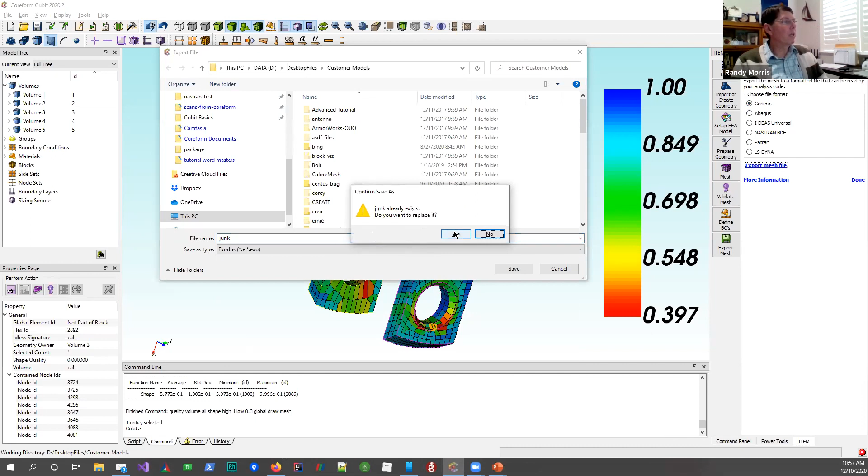I'm going back to item, I click done, export mesh. Again, a very simple dialog. I can generate a Genesis mesh, an Abaqus mesh — these 5 or 6 we thought were the most interesting or most commonly used. And then I could click export mesh, it'll give me the dialog, I'd give it a name, and it says it's already there, and finish, and there we go.

So that is that. Let me flip back to — unless there's something Carl you wanted to add — I'm going to flip back to the presentation. I think that's good.

Just quickly as we sort of wind up here, don't forget to imprint and merge.

Dirty geometry is an issue, right? Cubit is ACIS based, so we import SAT files and SAB files, which is the binary form of an ACIS file natively. And we don't typically have dirty geometry. But if you're importing from Creo, the tolerance is different, which might mean vertices and things which normally in ACIS would be coincident or merged, won't necessarily be in another solid model. That's where the dirty geometry is coming from.

Step files can be extremely dirty, right? Other files are dirty too. So we recommend healing the geometry when you import it, especially if it's not a native ACIS file. And again, the tweak and WebCut commands are probably the most commonly used for defeaturing and for preparing the model for hex meshing.

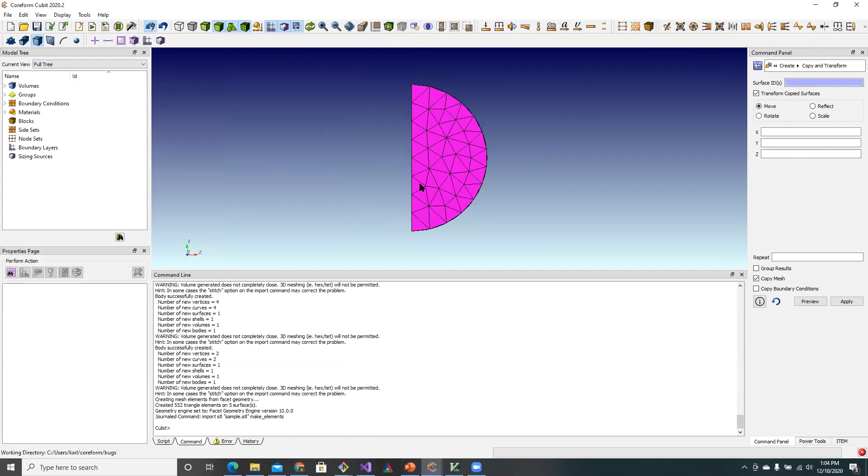Now, when this comes in, I have mine set up so that every volume comes in as a different color. So all of these actually come in from the STL file. That's a volume, but if I draw this, right click and draw, it's really just a surface.

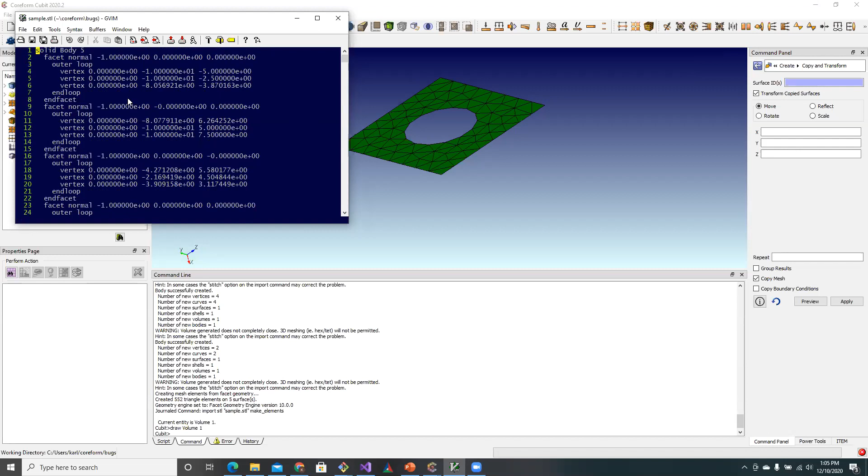And that's an anomaly of the STL file. If I go ahead and look in the STL file, I have a body that's defined here by all of these triangle facets. And I have multiple bodies defining this. So the fact that I have multiple bodies means when I bring them in, I create them as separate volumes.

So in order to work around that, we're not smart enough actually. We don't deal a lot with STL files. That's not our major focus. So we're not smart enough just to know, oh, this should have been one complete volume, even though STL told me it was multiple. So what we're going to do is I'm going to write this out again, and I'm going to export it, and say export this all, triangle all.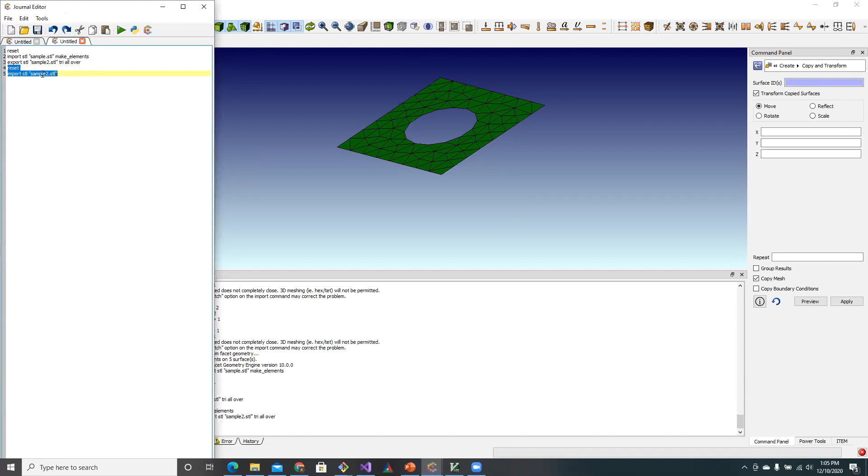I just want to put all the triangles out, and I want to export it as a single volume. So I'm going to go ahead and play that line. Export STL sample 2.stl tri all. I'm giving it the overwrite flag because I've run this several times already. I'm going to reset and read this back in. And now all those volumes are colored as one volume instead of having these things come out.

If I click on this volume now, I select the entire thing. If I come down here and say my scheme is tet mesh, I can just mesh this volume immediately. Oh, that's nice.

So it's partly understanding what's going on with the STL file and understanding that, oh, that's what happens, and that we are not smart enough to recognize that formed a closed body because the STL file didn't tell me it was a closed body. And is that a typical STL workflow, Carl, or is this unusual?

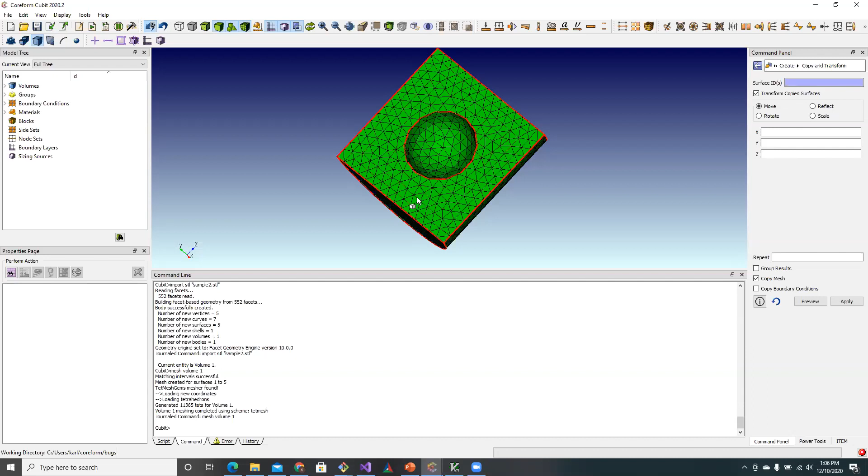That's a little bit unusual, but it's not that unusual that STL just says put every surface out into a separate body. So you brought that in, because it reported those things as what we call sheet bodies, right? Yes, zero volume bodies. And we know we can't make a closed volume from those. We can't mesh it as a volume. You exported all the triangles as a volume, you read it back in, and then we are smart enough to make a volume out of that, right?

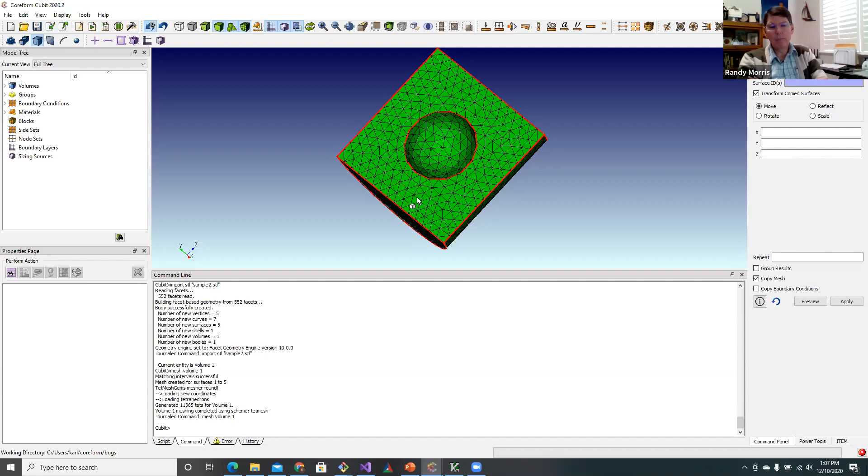Exactly. Yeah, okay, cool. So let's look, we have one other question, and then we probably better close the webinar, and we'd love to engage with everyone else more on forum.coreform.com with any other questions that you have.

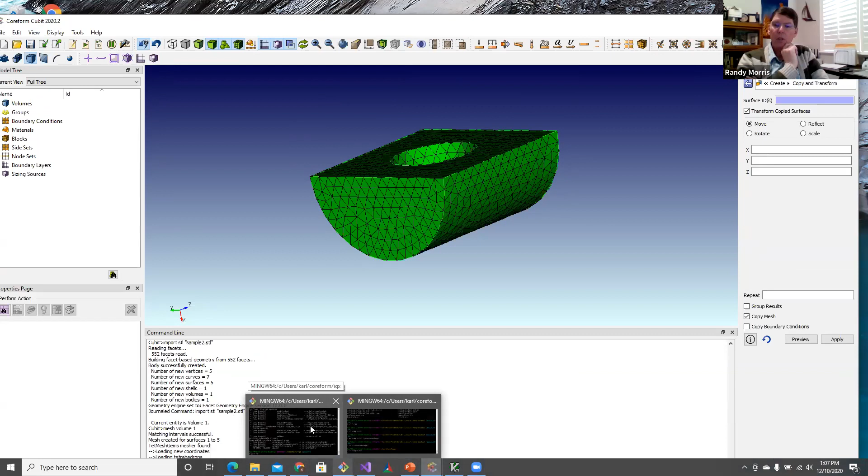This one's from Dustin. Are there tutorials on improving the mesh quality? It seems simplifying the CAD geometry is the best way, but are there tools on top of that? Oh, yes, tools for, so say that again, Matt. Are there any tutorials available for improving mesh quality?

So Dustin, this is the training that Sandia offers, that we have offered in the past, actually paid training. And there's a lot of topics covered in here, including all these things you just mentioned. So we recommend diving into some of these, they're PowerPoints. The sample models are also around on the site you can download. And I think this is a wealth of information, especially as you get into those higher numbered lectures, quite detailed. And that's how we train up our power users at Sandia and other places.